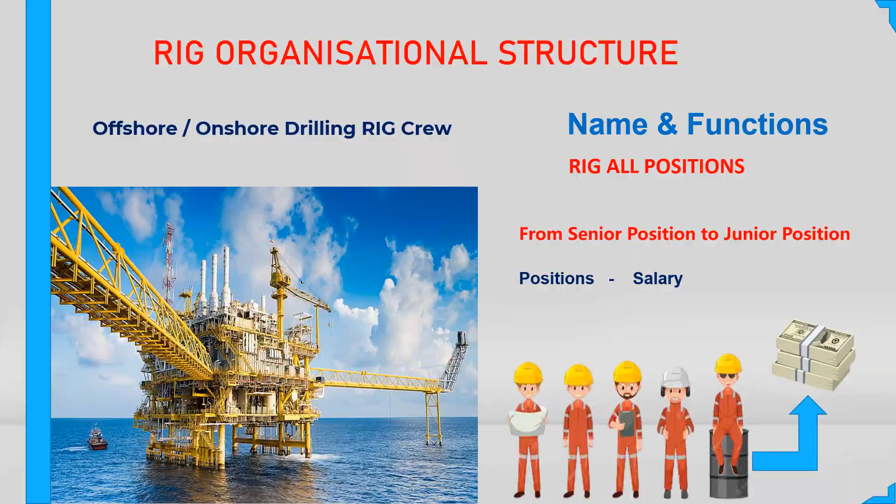Today our topic is rig organizational structure: what are the different positions in the rig, the chain of command, and what are the salaries for the different positions. So let's proceed to the next slide. It is a very clear picture of a rig floor.

Now, friends, this is a very clear structure of a rig for all the positions. The most senior person in the rig is the rig manager, and offshore this position is called OIM, Offshore Installation Manager. Below this we have tool pusher and night tool pusher. Tool pusher works in the day shift, and NTP, night tool pusher, works in the night shift.

Below this there is a driller, and after the driller there is a position called assistant driller. Assistant driller is also called AD. After that, in this structure, we have a Derrickman. Below the Derrickman there is a Floorman, and after the Floorman, Roustabout. Roustabout is the entry-level job of a rig.

And we have a rig HSE also. We also call him drilling safety officer. There is one mud engineer whose responsibilities are related to mud management. We have chief mechanic in the rig, and mechanic, and chief electrician for all the electrical operations, and electrician.

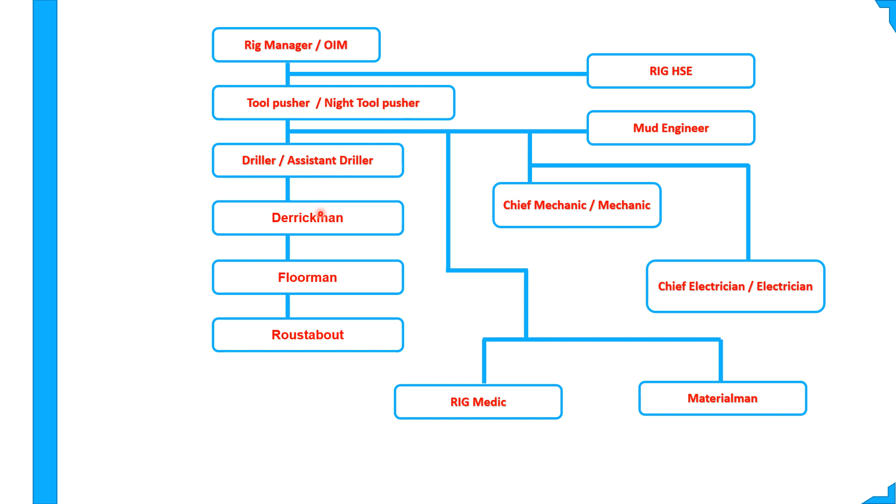Now, the most senior person in the rig is the rig manager. The rig manager is in charge of the rig and all operations. Rig manager is sometimes also called tool pusher. He essentially supervises all the staff on the oil rig, as well as the drilling activities and equipment. And he has to focus on the safety issues as well.

And here is written rig manager, sometimes also called the tool pusher. Why? Because in some rigs there is no rig manager position. So the tool pusher is the responsible person. He has to do all the jobs. Actually, he will be responsible for that.

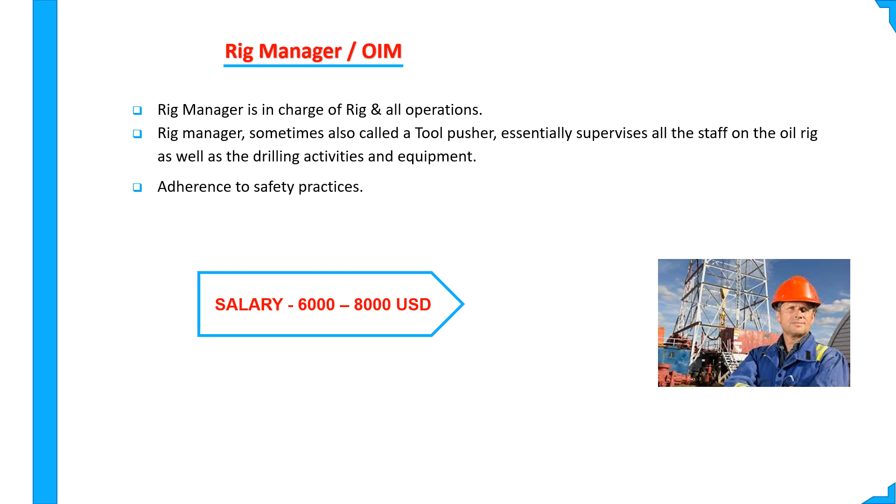And the salary I will discuss here is not fixed, because the salary will vary. It may be different depending on which company you work in, or which country you work in. So this is a general salary standard. For the rig manager, the salary range is around 6,000 to 8,000 USD per hitch of 28 days. Then tool pusher and NTP.

Tool pusher is in charge of all operations. Tool pusher has to ensure all the required documents, equipment, OEM, which stands for original equipment manufacturer, certificates for every equipment, third party inspection certificates, and crew training certificates are available at the rig site before the operation is started. And the salary range for the TP will be 4,500 USD to 6,000 USD.

Then the driller. Driller is a very important role in the rig. He is responsible for assembling drilling tools and connecting sections of the drill pipe, and operating the machinery that raises and lowers the drill string and bit. He has to operate the traveling block and draw works. So it's a very responsible job.

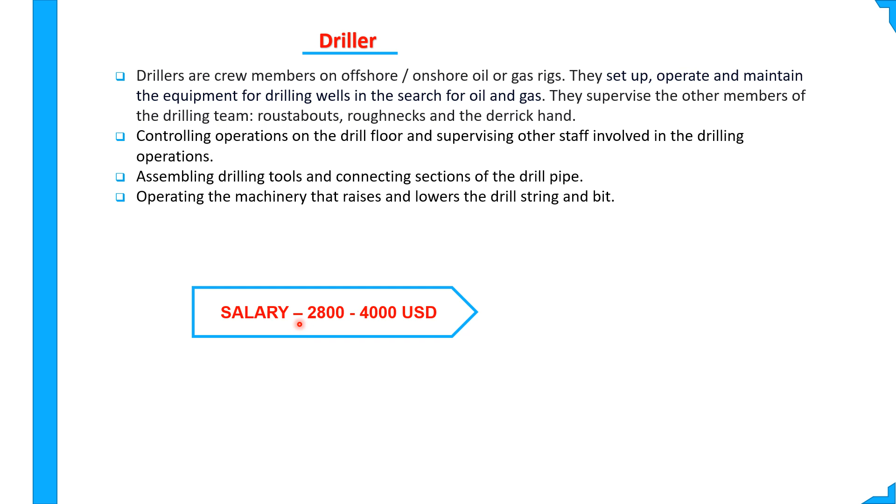He has to look after the readings on his driller console, about the weight on bit and the speed of the rotation of the drill string. And his salary may be 2,800 USD to 4,000 USD.

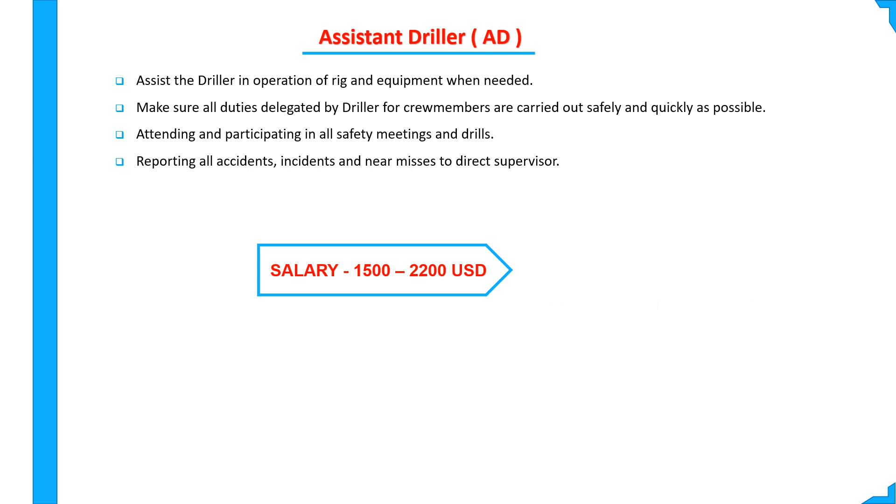And assistant driller, AD. Assistant driller assists the driller in operation of the rig and equipment when needed, and makes sure all the duties delegated by the driller for crew members are carried out as safely and quickly as possible, attending and participating in all the safety meetings and drills, and reporting all the incidents to the tool pusher and safety. And his salary range is 1,500 to 2,200 USD.

The Derrickman is a very responsible job actually, because the Derrickman works on the monkey board that is located at a great height. The height from the rig floor is 90 feet. There is a monkey board there.

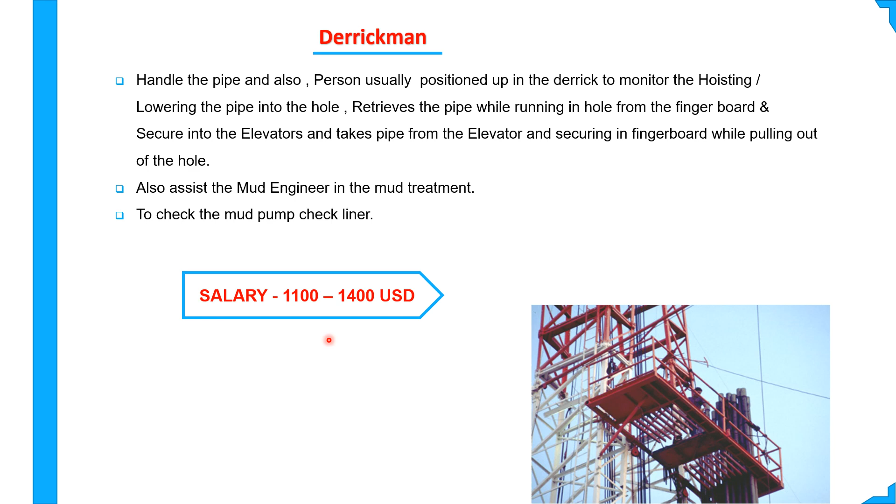This person stands and handles the drill pipe at the time of tripping, and 25% of his working hours in a day he works in this elevated area at the top, and the rest of the time he works down below. And his responsibility also includes assisting the mud engineer in the mud treatment. And his salary range is 1,100 to 1,400 USD.

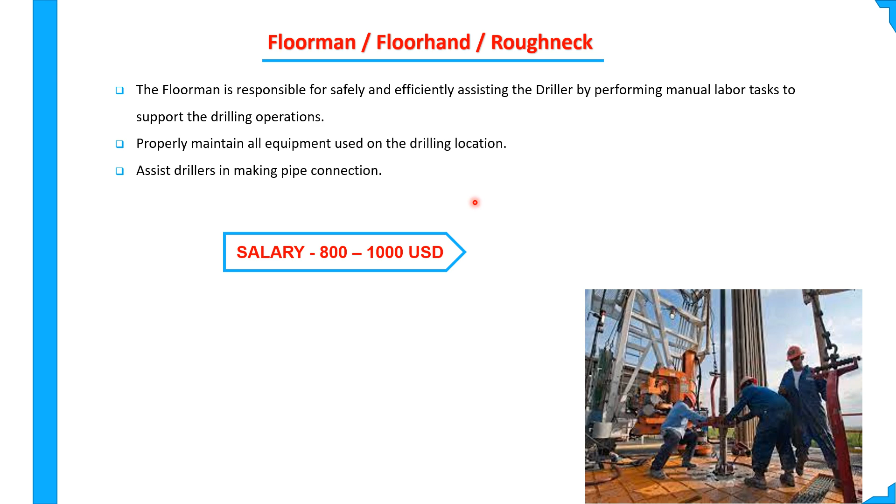A floorman is a very responsible and hardworking job. These people work on the rig floor all the time. The floorman is also called floorhand and roughneck in different locations and companies. The floorman is responsible for safely and efficiently assisting the driller by performing manual labor tasks to support the drilling operations and making the pipe connections and casing connections on the floor. And his salary is 800 to 1,000 USD.

Roustabout, as I said, is the entry-level job in the rig. We can say the laborer of the rig, the handyman of the rig, responsible for maintaining the housekeeping in the rig, and movement of material from the warehouse to the other side, assisting with equipment installation, disassembling and assembling.

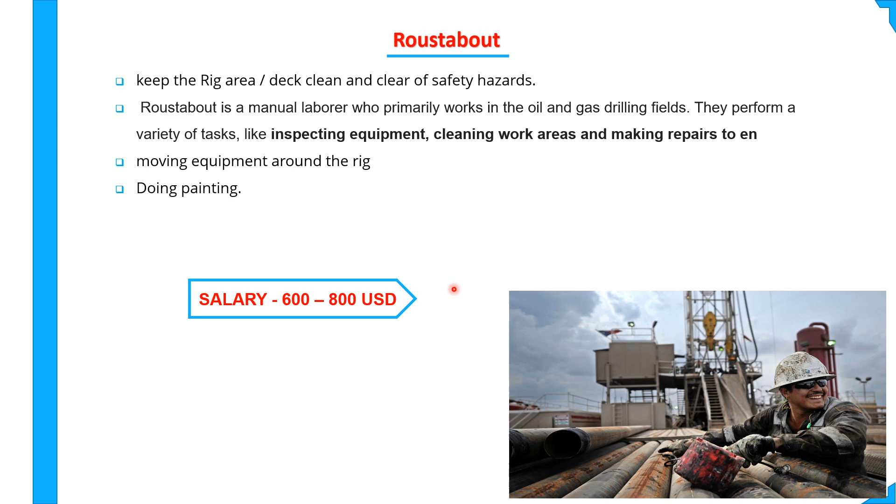And he is also responsible to give assistance to the crane operator. His job is a very hard working job, all the time in the rig. So his salary range is 600 to 800 USD.

And rig HSE officer, this person is very responsible in the rig, because this is the person who has to look after, and he's the only one responsible for all the safety related issues. He has to train his crew, he has to coach his crew, he has to look after all the hazards and evaluate the risk, and advise the control measures to the rig working crew.

The rig HSE officer has to ensure that the company and client HSE standard has been understood by the rig crew, and it is applied in the daily activities. And he has to ensure that the permit to work system is being implemented at site, and he has to deliver the HSE induction to the new rig crew and service company and visitors.

And he has to look after all the safety related issues, and that all the operations are being conducted safely. And he has to involve himself in the meeting with the company man and client HSE. And he has to send a daily report to his HSE coordinator, as well as to the rig site client HSE advisor and company man. And he has to ensure PPE compliance is present at the rig site.

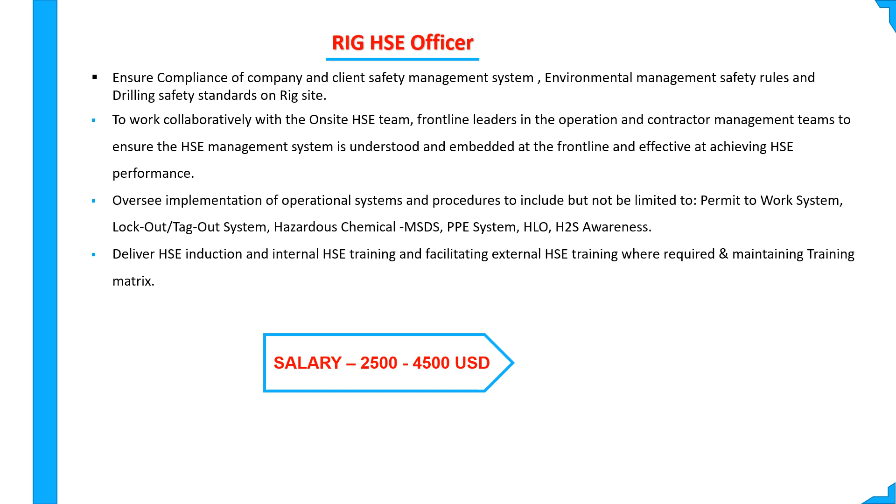The chief mechanic and mechanic. The chief mechanic works in a day shift, and the mechanic works in the night shift. This position is responsible for all the mechanical related maintenance, the scheduled maintenance, the preventive maintenance, and he's responsible, when the rig move is going to be conducted, to disassemble all the mechanical equipment. And after the rig move, when the rig is going to be rigged up in the new well location, he ensures that all the mechanical equipment will be assembled correctly.

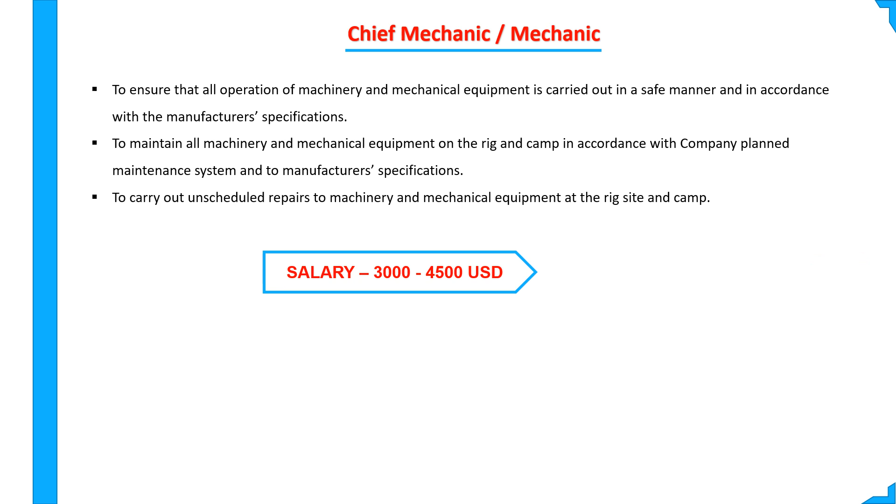And he is also responsible to carry out unscheduled repairs to the machinery and mechanical equipment at the rig site, as well as the camp. The chief electrician and electrician. The chief electrician works in the day shift and the electrician works in the night shift. This chief electrician is responsible for all the electrical related maintenance and troubleshooting. And he's also responsible for the scheduled maintenance of the electrical equipment and for the unscheduled repair of the electrical appliances and equipment.

And the chief mechanic and chief electrician have to ensure that all the spare parts of their equipment are being maintained in the warehouse and in the inventory, so that at the time of an unscheduled repair of the equipment, there will be no delay. So all the spare parts should be maintained. So his salary may be 3,000 to 4,500 USD per month.

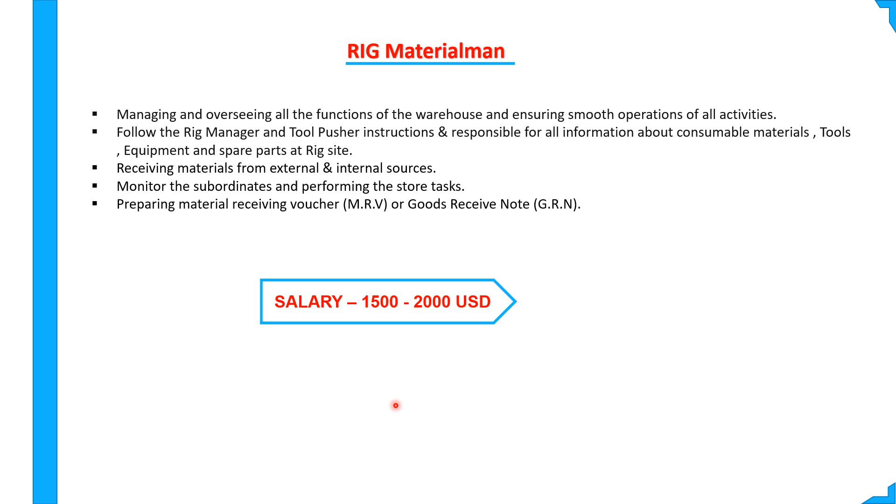And the rig material man is responsible for all the materials receiving at the rig site, issuing the material to the rig crew upon presentation of the material request slip, and he has to maintain good housekeeping in the rig site store, and he has to take care of all safety issues, and his salary may be 1,500 to 2,000 USD.

The rig medic, this person is responsible for all the medical related issues, for all the first aid and injury and ill health related issues, and he has to maintain the first aid log sheet, and he has to maintain the inventory of all the required medicine and medical equipment, and his salary may be 1,800 to 2,500 USD.

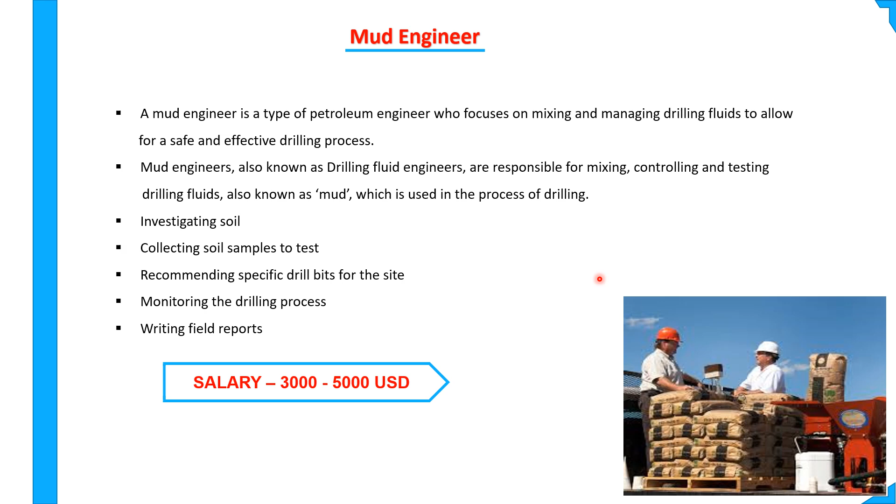And the last position, we have a mud engineer. This is also a senior position in the rig, and the mud engineer is responsible for all the mud related activities, the preparation of the mud, and he has to advise what characteristics of the mud will be used, and he has to also advise what type of pill will be used, and his salary may be 3,000 to 5,000 USD per month.